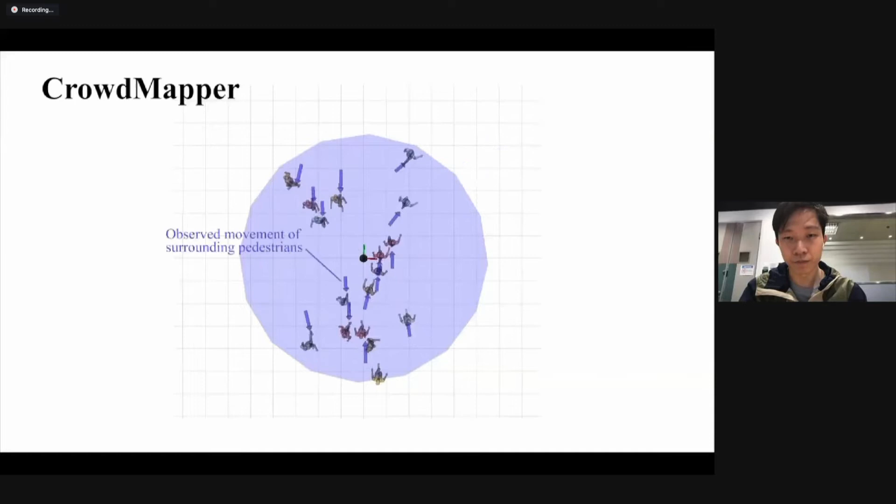So I will introduce the Crowd Mapper module. As we can see, a blue circle represents the local perception radius of the robot. Within the perception radius, the robot can observe the movement of the surrounding pedestrians. Then, we apply the clustering algorithm to model the movement into the crowd flow map. This map represents the pedestrians' movement pattern in the environment.

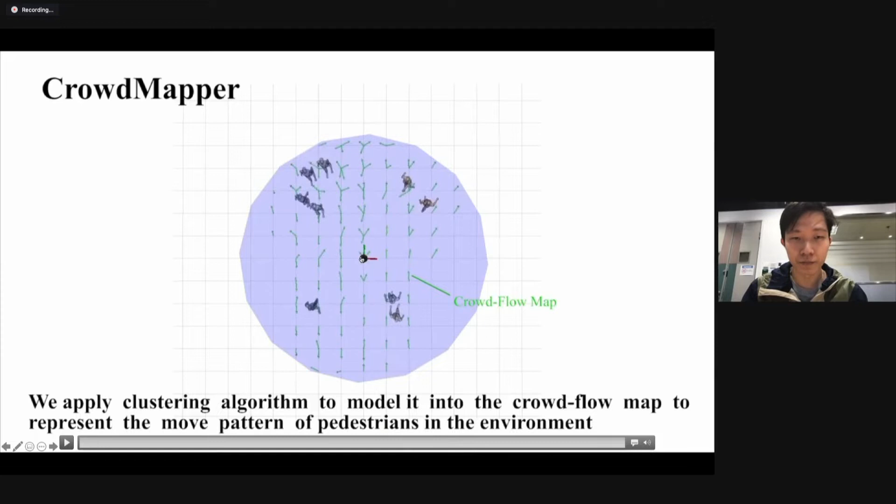By fusing the local crowd flow maps, we can construct the global crowd flow map. The traversable area can be obtained after mapping. The mapping process is completed by the local perception of the robot. Here, we don't use any global perception system like bird's-eye view CCTV.

By using the crowd flow map that we built, we introduce the particle filter-based approach with a flow matching metric. In this video, we compare our crowd-driven localization approach with pure odometry and the geometry matching based AMCL. The red dots represent the particles of our Crowd Localizer. As we can see, the pure odometry will drift at the beginning.

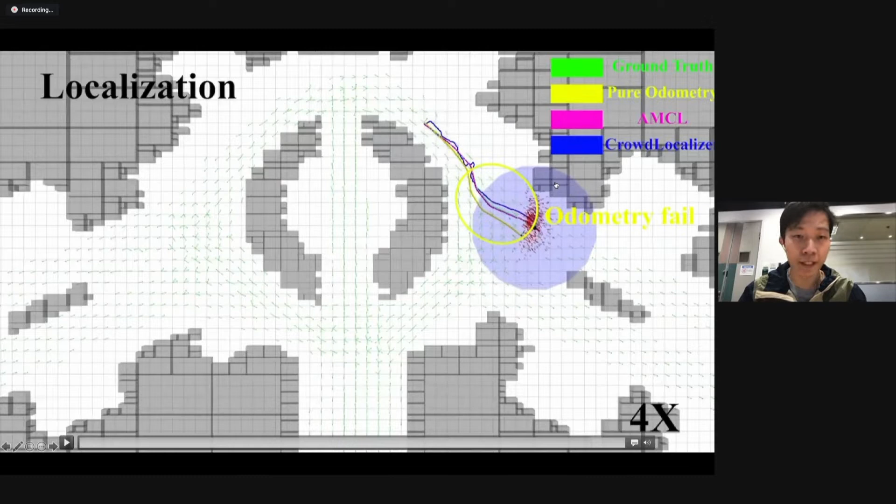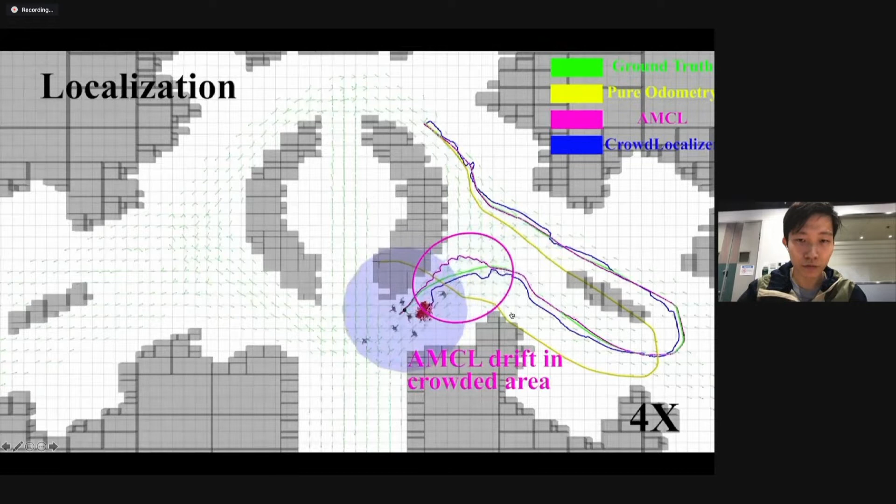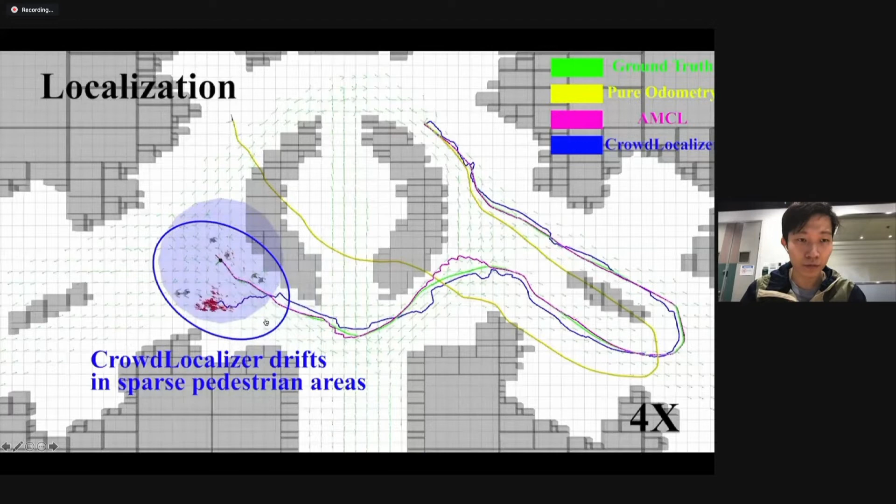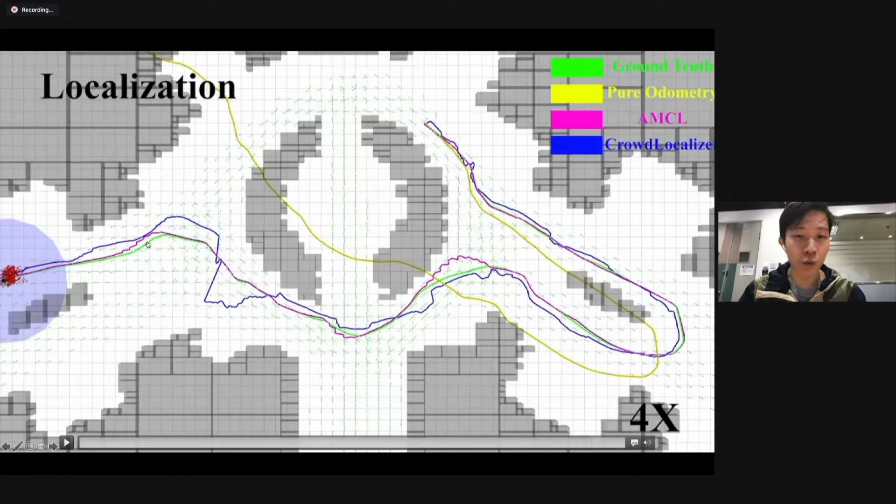For AMCL, localization drift may occur at the intersection of crowds where pedestrians block most static landmarks. However, our approach may drift in areas with sparse pedestrians. But when the number of observed pedestrians increases, the drift can be corrected. This localization experiment shows that the crowd flow sensory is complementary to the geometry information for localization.

Note that our system is not a SLAM system. It cannot achieve mapping and localization simultaneously. Most SLAM approaches rely on instant and time-invariant features, for example, point cloud features in LiDAR SLAM and image features in visual SLAM. These features are time-invariant and can be observed instantly.

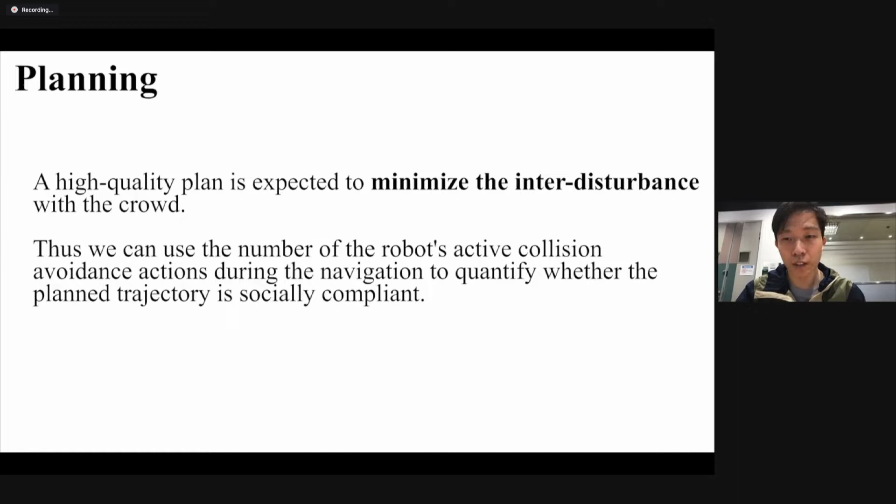Next, we propose that a crowd flow map can help robots achieve socially aware planning. At the beginning, we first define high quality socially aware planning as planning that minimizes the mutual disturbance with the crowd. So we can use the number of the robot's active collision avoidance actions to quantify whether the trajectory is socially compliant.

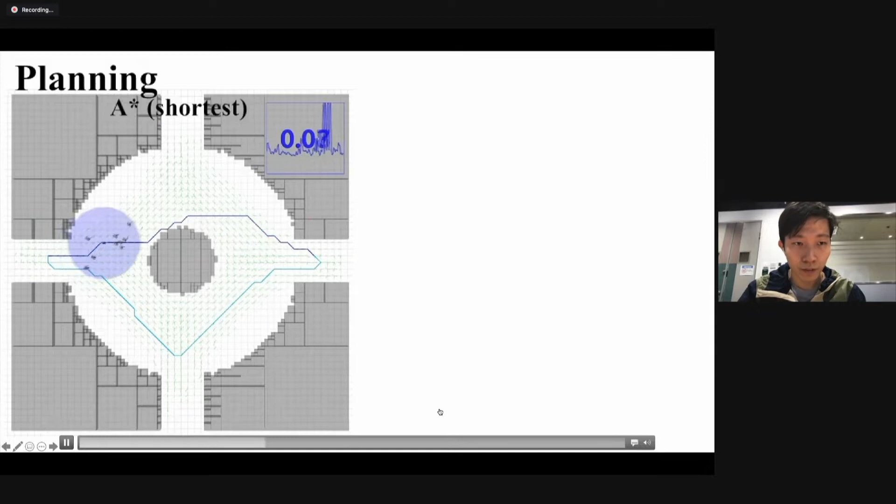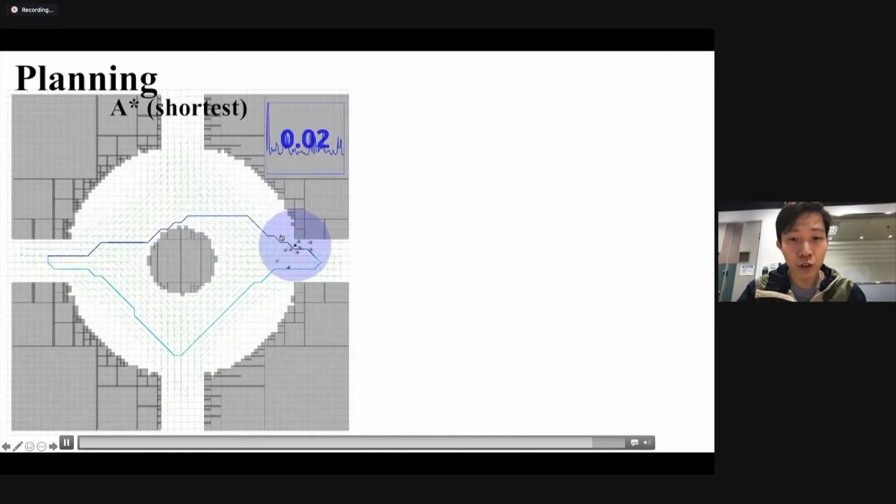As we can see, a traditional planning algorithm, A*, can generate the shortest trajectories, but the shortest trajectory would disturb the movement of the crowds.

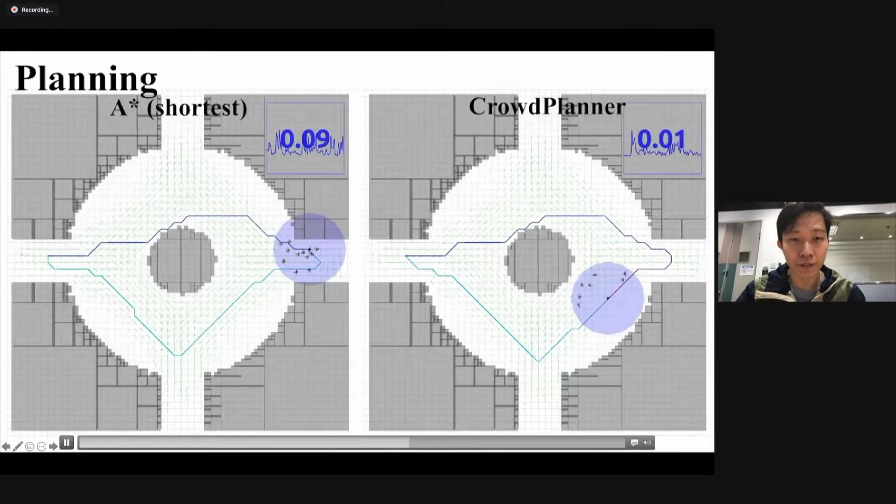However, the trajectory generated by our social aware planner may be longer, but it can lead to less disturbance for the crowd flow. For the traditional planning, the disturbance will occur in the entire trajectory. But the disturbance mainly appears in the intersection area for our social aware planner.

We also deploy our system on a real robot to validate its feasibility and performance in the real world. To make a real scenario with dense pedestrians, we conducted experiments on a university campus at rush hour. We mount a 3D LiDAR and a multi-camera system on our robot to track the surrounding pedestrians.

Conducting real-world experiments is not trivial. Beforehand, we need to calibrate the 4 cameras with a 3D LiDAR. With these sensors, we need to detect and track the surrounding pedestrians on limited onboard computational resources.

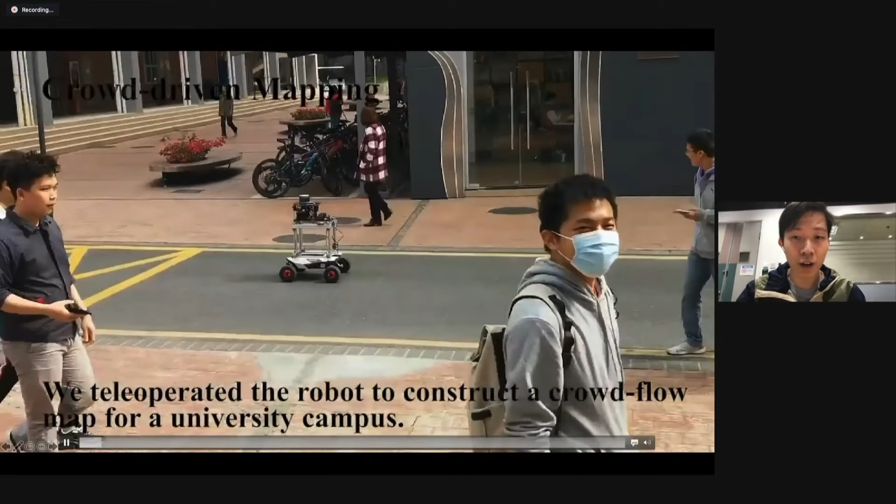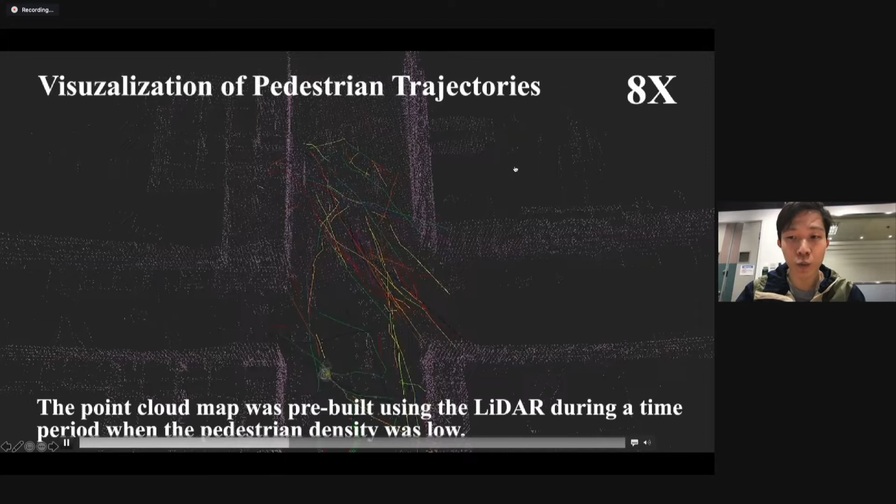We first introduce the crowd-driven mapping experiment. We teleoperate the robot to construct the crowd flow map in this scenario. A point cloud map was pre-built using LiDAR when the pedestrian density was low. Here, the localization results are provided by the LiDAR and the GNSS.

Slow down. Okay, we can perform mapping based on the movement of all pedestrians in this scenario. We highlight the possible crowd intersection in the crowd flow map in this scenario.

I think we have a problem. Sorry, could you just give us a moment? We had a network issue here, because you were frozen at a certain point. Okay, now it seems to work. Go ahead, please. Sorry about that. Do I need to repeat this slide? Yeah, just go one before, just in case. It's frozen again. Can you hear me? Yeah, we can hear you clearly. Can you see my slide? Just give us 1 second to set up. Sorry about this. All right, go ahead now. So I will continue my slide here or next slide.

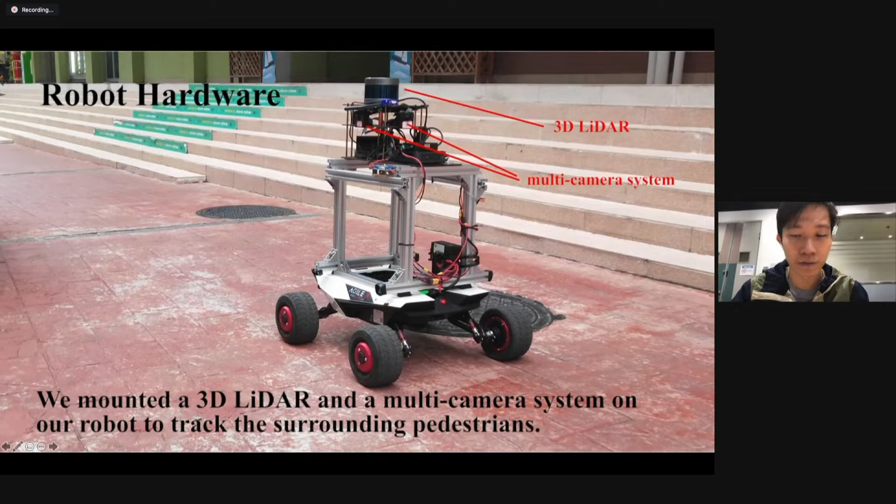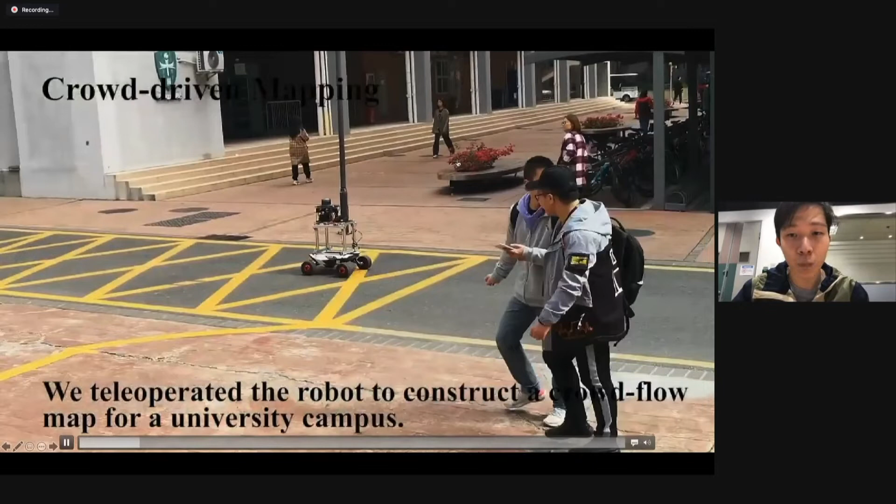Conducting real-world experiments is not trivial. Beforehand, we need to calibrate the 4 cameras with the 3D LiDAR. With these sensors, we need to detect and track the surrounding pedestrians on a limited onboard computational resource. Here, I will first introduce the crowd-driven mapping experiment. We teleoperate the robot to construct the crowd flow map in this scenario.

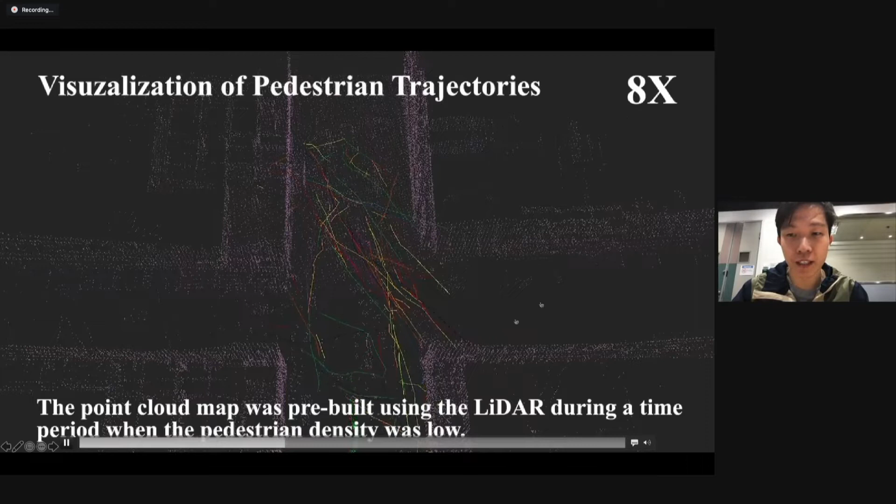The point cloud map was pre-built using LiDAR when the pedestrian density was low. And the localization results are provided by the LiDAR and the GNSS. And we can perform mapping based on the movement of all pedestrians in this scenario. And we highlight the possible crowd intersection in the crowd flow map. Then we can use the crowd flow map for the crowd-driven localization and planning.

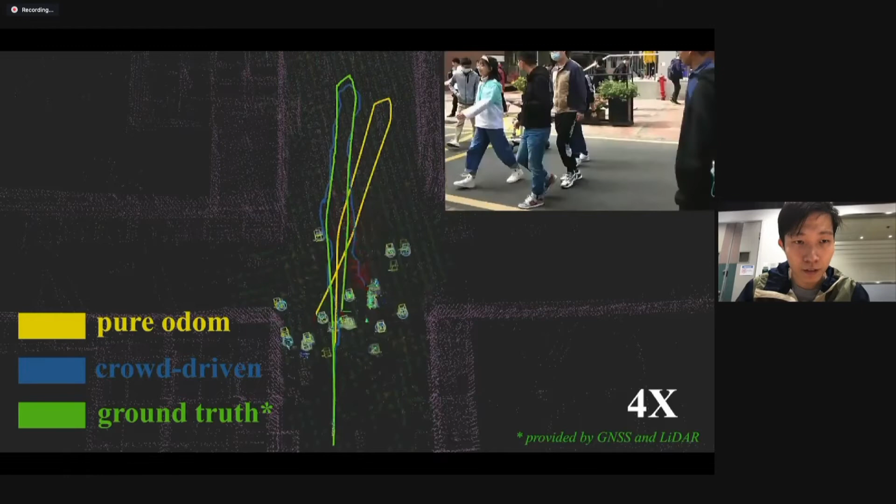As we can see, our approach can outperform the pure odometry method. Similar to our simulation result, our crowd-driven approach can achieve a rough localization in a crowded scenario.

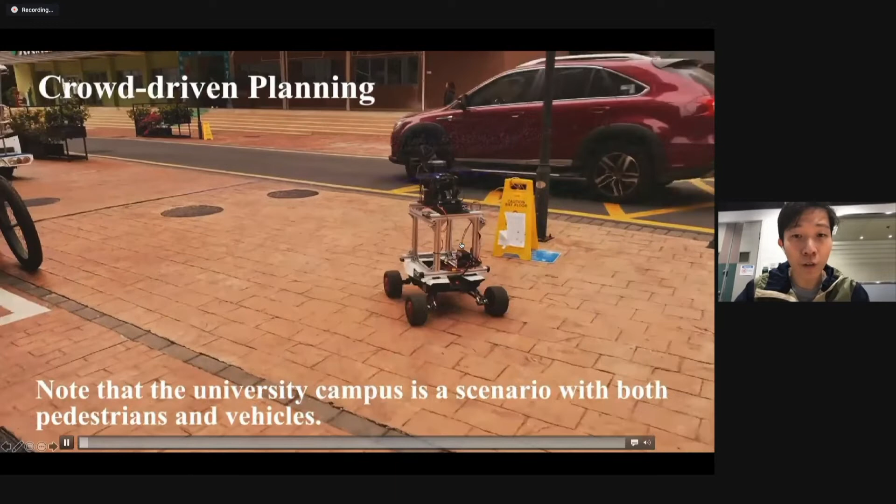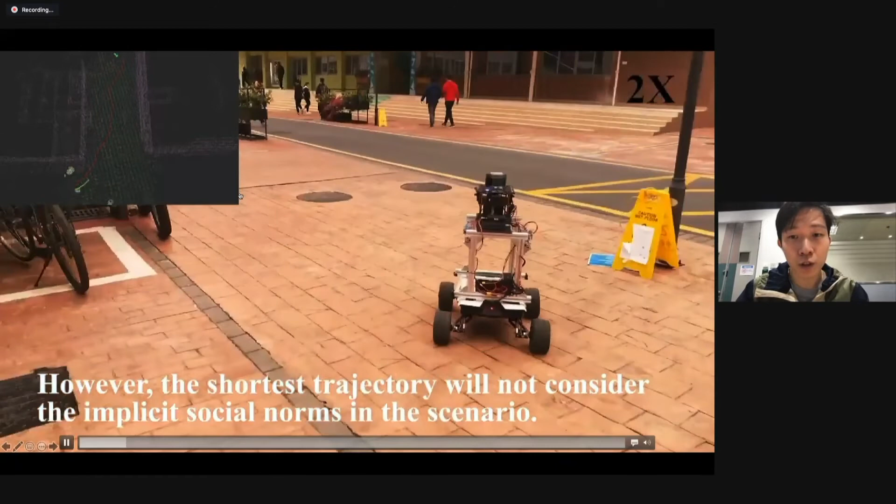For this campus scenario, with both pedestrians and vehicles, our crowd-driven planner and traditional planner generate 2 different trajectories. As we can see, the traditional planner will plan the shortest trajectory toward the goal. But the shortest trajectory will not consider the implicit social norms in this scenario, and the robot will block other vehicles on this asphalt road.

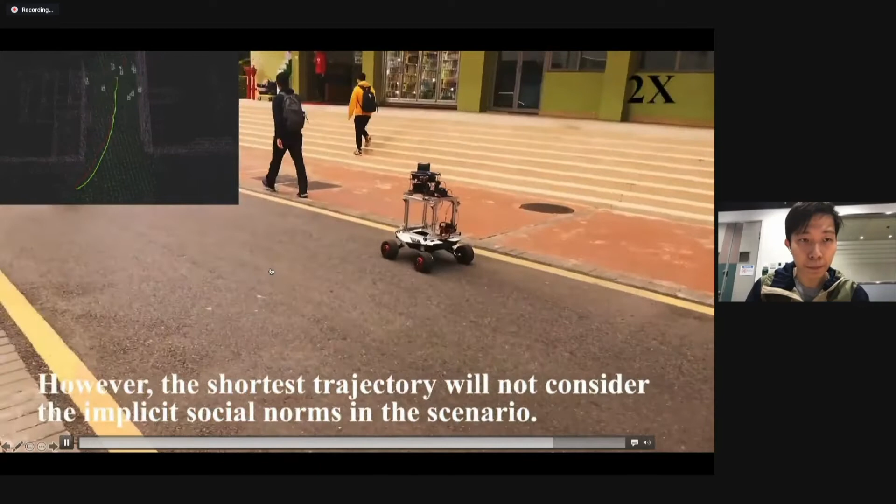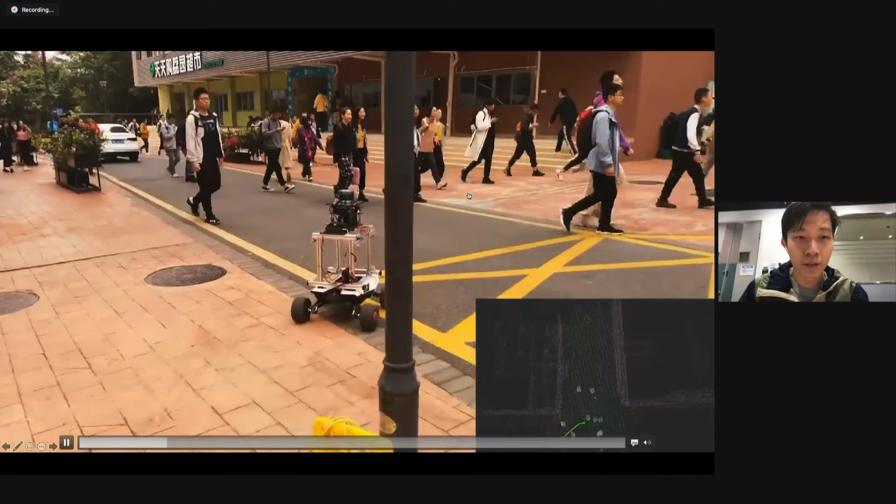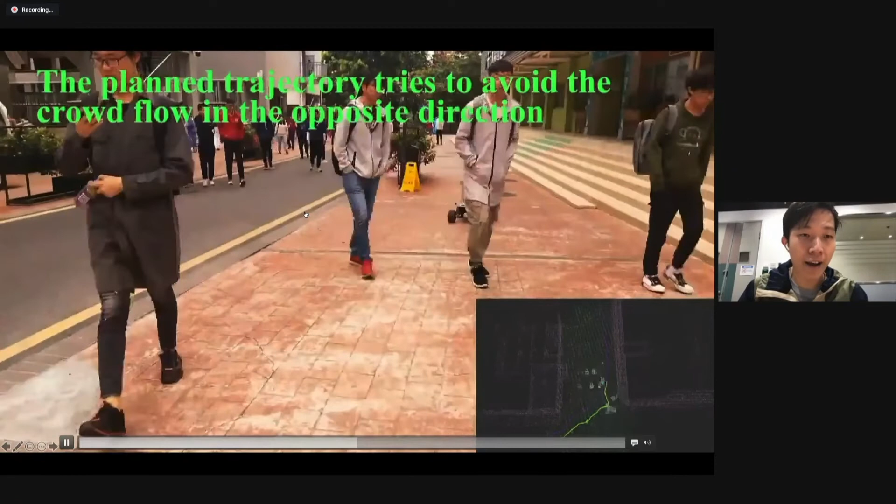However, a social aware trajectory tends to cross the asphalt road first and then walk along the brick road. Actually, both types of roads are traversable for the robot. But our approach can interpret the deeper social rules in this scenario. On the asphalt road, vehicles have higher priority, while on the brick road, pedestrians have higher priority.

In this paper, we validate that our approach can only utilize the crowd flow information as the sensory measurement for robot mapping, localization, and planning. We show that the crowd flow information is complementary to the spatial information for navigation. In our future work, we can combine the crowd flow information and spatial information to realize better navigation.

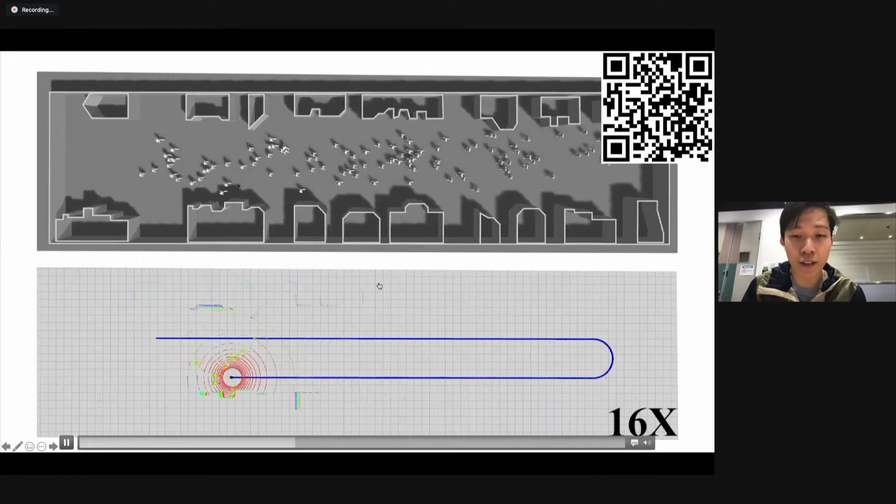If not, I'll just ask one more of a technical question. Xinjian, that's a great presentation. In your simulation data, can you explain how you got the simulated human data? Or did you collect it with an overhead camera? And then also you had the mapping process. You had a multi-resolution map for the AMCL. How did you go about getting that?

Okay, so for the simulation, we use Menge to simulate a highly crowded scenario, or highly crowded pedestrians, in our simulation. And for our real-world experiments, do you want to know how to track the surrounding pedestrians or how to do the mapping? Yeah, so you had a multi-resolution map you didn't have for the occupancy-based mapping, right? So you're using your own way of keeping track of the pedestrian flow. Could you explain how that data structure was stored?

Oh, we used the RGB camera to detect the pedestrian's appearance, and then we project the pedestrian's bearing angle to our 3D LiDAR. Okay. Right. And then we can get a pedestrian's 3D position, and we can use a pedestrian motion model to track the pedestrians in the surrounding environment.

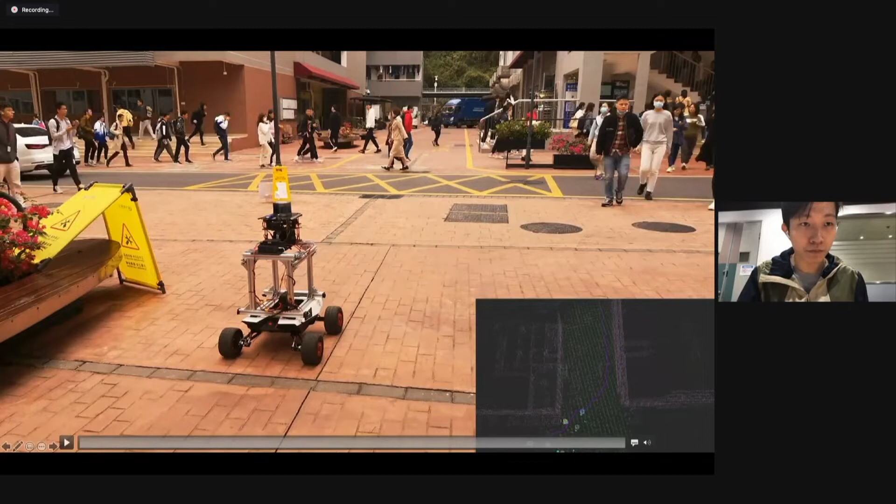All right, thank you. If no more questions, then we'll move on to our next speaker. Thank you, Xinjian, once again. So next we have Sheng Yan talking about visual semantic mapping and localization using parameterized road lanes. Sheng, take it away whenever you're ready.

Hello everyone, can you hear me? Yes, we can hear you. Okay, and can you see my screen? Sorry, wait a minute. I'll just give it 1 second. Oh, I'm sorry, I don't have a camera here, so I just share my screen. Is that okay? Yeah, that's okay. Are you presenting? Okay, sorry, I need to reboot this Zoom program and continue, okay? So Sheng, we will just move on to our next one. Could you try to set it up in the meantime? We'll move to our next talk and come back to you.

Okay. So Andrea, are you on the call? Yes, I am. Can you guys hear me? He wanted to play the video. Yeah, can you guys hear me all right? Yeah, we can hear you.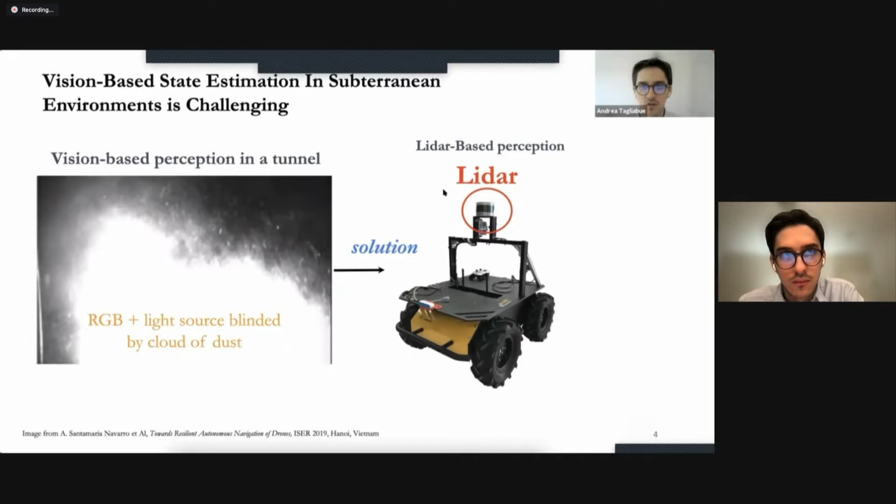For this reason, Team CoSTAR decided to adopt LiDARs as their main sensing solution for their state estimation strategy. LiDARs, however, are not perfect and they have their own failure modalities. And we identify one, which we call motion unobservability. This happens when the geometry of the environment lacks 3D features, so that it becomes hard to understand or estimate the motion of the robot. You can see an example of this issue in this video, where we are showing the point cloud recorded by one of our robots navigating in a corridor. As the robot moves through the main direction of the corridor, geometric features disappear, making it really hard to understand if the robot is moving forward or not. In this case, for example, it's not moving.

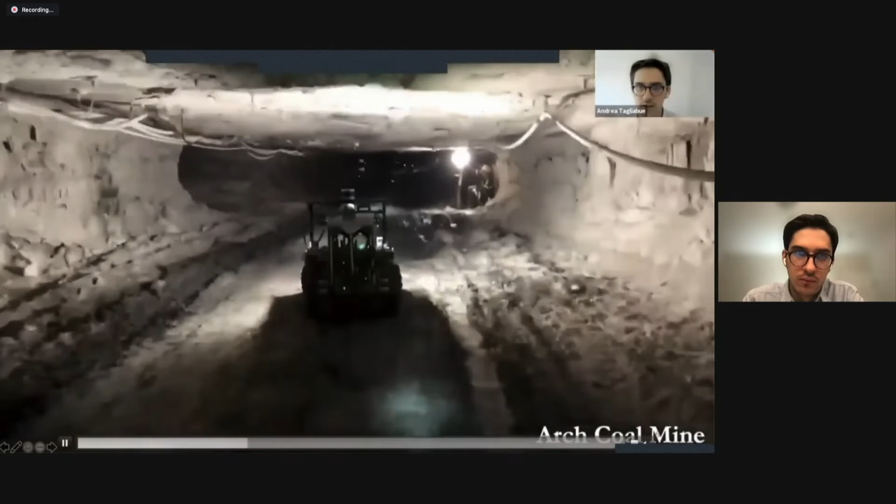In this work, we will present a strategy to enable state estimation using LiDARs for robots deployed in challenging subterranean environments, as you can see in this video, which represents one of the field tests that we performed where our algorithm has been deployed.

And we will additionally present a strategy to detect geometric unobservabilities in the scene that may cause failures when using LiDARs for state estimation. And here you can see the output of our algorithm, which is represented by these 3 arrows, which encode how much each direction of motion is observable.

So next, I will discuss the technical approach, which is divided in 2 main sections, the sliding window estimator and the geometric observability detector. But first, I will provide an overview of the proposed solution, which is represented by this diagram. The main takeaway is that our method relies on the information provided by a LiDAR, as well as an inertial measurement unit. This data is pre-processed and fused in a sliding window estimator. The objective of this algorithm is to output an odometry estimate of the robot.

This estimate is passed down to an algorithm called the resiliency logic, which has been developed in previous work. The objective of this algorithm is to understand if the odometry produced by our method or any other state estimation methods available on the robot are reliable, based, for example, on the fact that some sensors may have failed or some algorithms may have diverged, and choose the odometry estimate that is more reliable, sending it to the underlying autonomy stack. So this algorithm acts as a multiplexing solution for different state estimation methods.

And in order to let this algorithm understand if our state estimate can be reliable or not, we introduce the observability detector, which provides information on the possible quality of our odometry and state estimates, allowing the resiliency logic to switch to alternative sensing modalities if the geometry of the scene does not allow to correctly estimate the motion of the robot. I will now describe the sliding window estimator that we use to produce our odometry estimate.

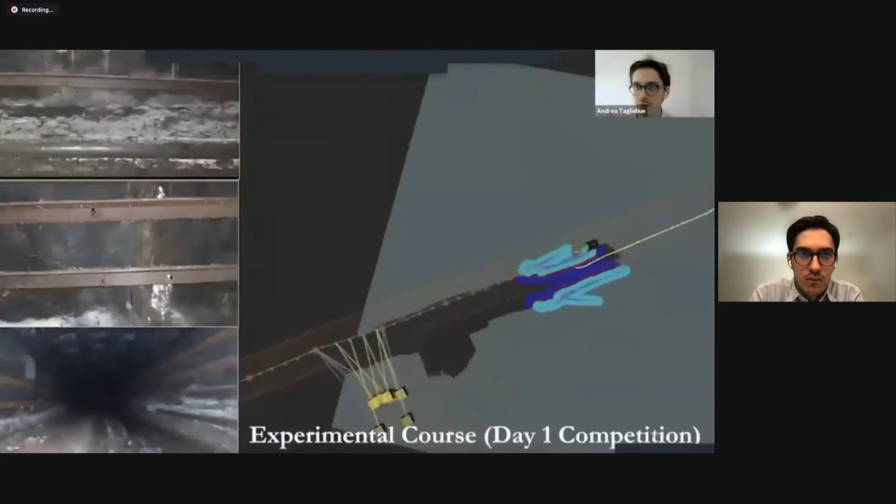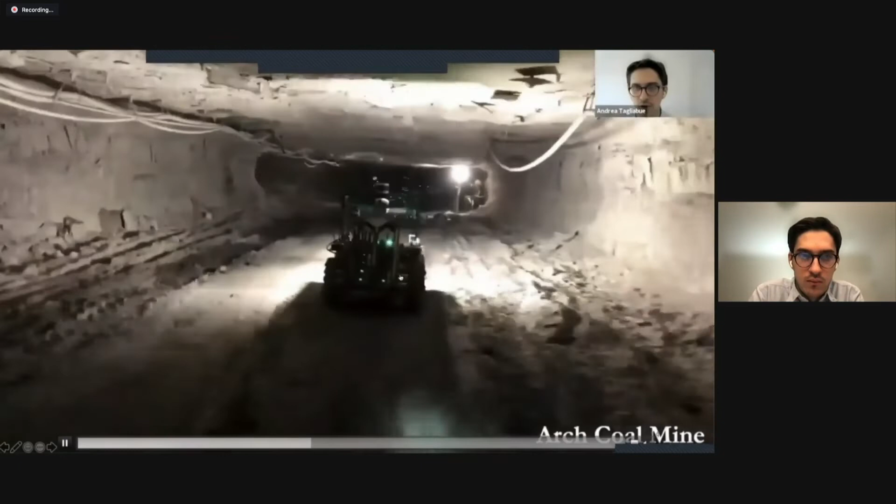The output of Lion is also being used, for example, as input to the planning modules that you can see here. And again, here you can see the type of terrains and environments where the robots have been deployed. And as you can imagine, methods based on wheel odometry become extremely unreliable, as you will see also in the evaluation, because of the muddy terrain and the fact that the wheels can easily slip.

We compare our method with 2 other solutions, which are the wheel inertial odometry, which is based on using the output of wheel encoders and fusing them with IMU measurements using an extended Kalman filter, and LOAM, which is a LiDAR odometry method described in this paper, which does not use, for example, IMU measurements. And Lion is used without the observability module in the context of this evaluation. And the ground truth is computed using LAMP, which is the global localization solution developed by Team CoSTAR.

However, Lion presents some key system or field advantages, which are the fact that its output is gravity aligned thanks to the fusion of IMU estimates. It outputs the velocity of the robots, unlike LOAM, as well as the extrinsic calibration. And its output can also be generated up to IMU rate, unlike LOAM.

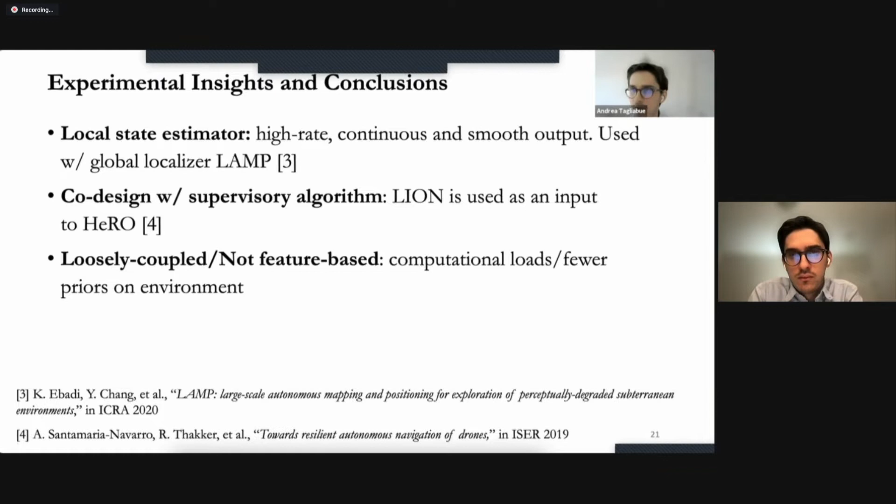In addition, we decided to use a loosely coupled and non-feature-based approach for the following reasons. First, there is a computational advantage because feature extraction is in general computationally expensive, and it is possible to share the computational cost associated with performing the ICP algorithm, for example, by reusing the output of ICP for other algorithms. Additionally, not using features allows us to have fewer priors on the environment, making the method potentially more generic. So with this, I've concluded, and I'm happy to take any questions.

Thank you, Andrea. So, any questions from the audience, or even the virtual audience? I guess if not, we are really running over time.

I'll just ask a quick question. When you're doing the observability detection and then switching controllers, how do you handle any discontinuities that you would get from your different sources of odometry? Yes, so I believe this is taken care of internally by the resiliency logic, which modifies the reference frame of the sources to take that into account. So it transforms.

I believe that what changes is the goal for the controller rather than the state estimates. So that frame gets updated. So the discontinuity is pushed into the reference position for the controller, for example, rather than having a jump in the state estimate. Mm-hmm. All right, thank you.

Yeah. All right, thank you, Andrea. We'll move on to our next speaker. Again, Sheng, are you ready with your slides? Yes, I'm ready now. Can you see my screen this time? Just give us 1 second. Hello, can you see my screen this time? Just 1 second, Sheng. Yeah, now we can see you. Can you put it in presentation mode, please? Okay. Sorry for the interruption, and now I will begin my presentation.

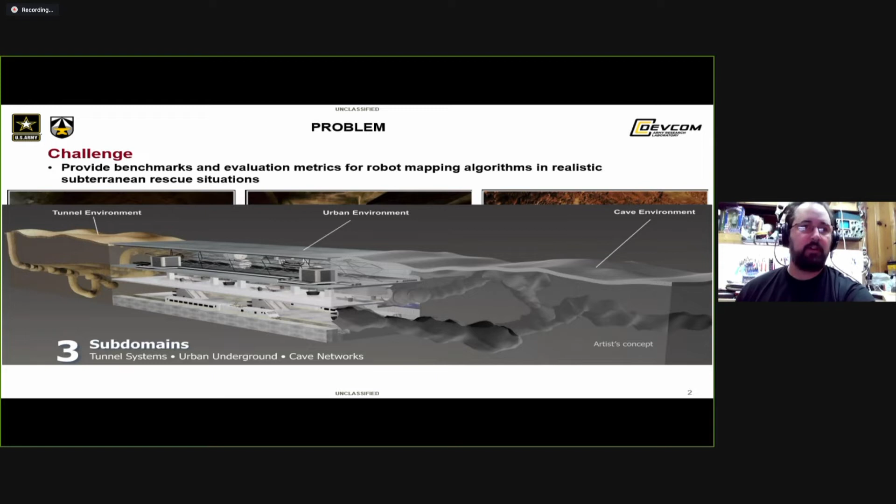Briefly, my work is focused on the evaluation of SLAM algorithms, simultaneous localization and mapping. SLAM is a technique for robots to localize themselves in the environment or determine their trajectories, while simultaneously recovering a map of that environment, which can be used for navigation. Typically, in modern implementations, this consists of smoothing a graph of measurements of features or landmarks or relative poses of robots as they move along their trajectories.

In the urban underground circuit, the course was built inside the abandoned, incomplete nuclear generation plant in Washington State, United States. This facility has 1 out of 2 reactor buildings constructed, but never featured any of the heavy equipment or reactor cores. In the main reactor building, where the alpha and beta courses were constructed, there's a central chamber which would have been the location of the reactor core.

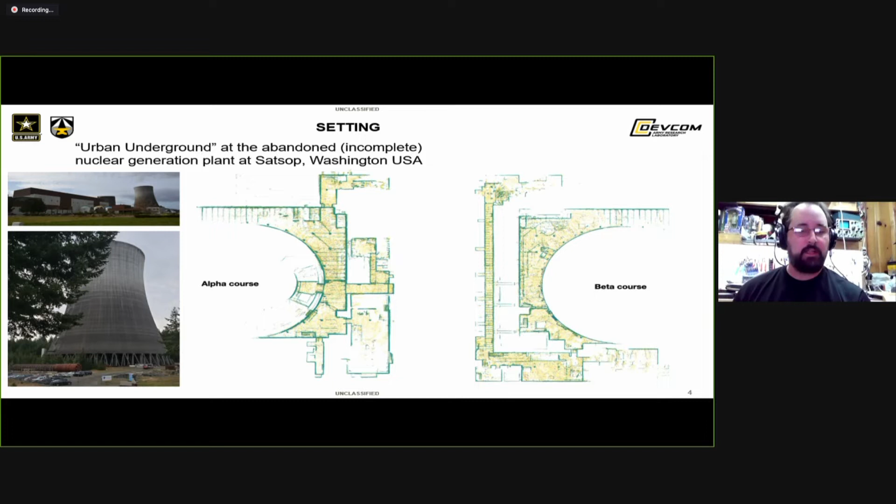We used our robot systems from the Army Research Laboratory to collect the data sets in these courses, and to handle the specific challenges in the urban circuit, which consisted of a number of stairways that had to be traversed. I've used an iRobot PackBot Explorer with flippers that enabled me to drive down the stairs to some degree of

success. And on board this robot, we collected data from Ouster OS1-64 LiDAR, as well as the Carnegie Robotics Multisense SL Stereo and LiDAR. This was also used to provide illumination so that the artifacts within the course could be detected. On board the robot, we also use a MicroStrain 3DM-GX5-25 IMU.

Thanks to the efforts of my colleagues at MIT, we were also able to bring in a quadrotor robot to collect an aerial version of the data set as well. And here is an image of it. It consists of a RealSense D435i, and therefore it's only collecting a visual data set, and it does not have any onboard illumination.

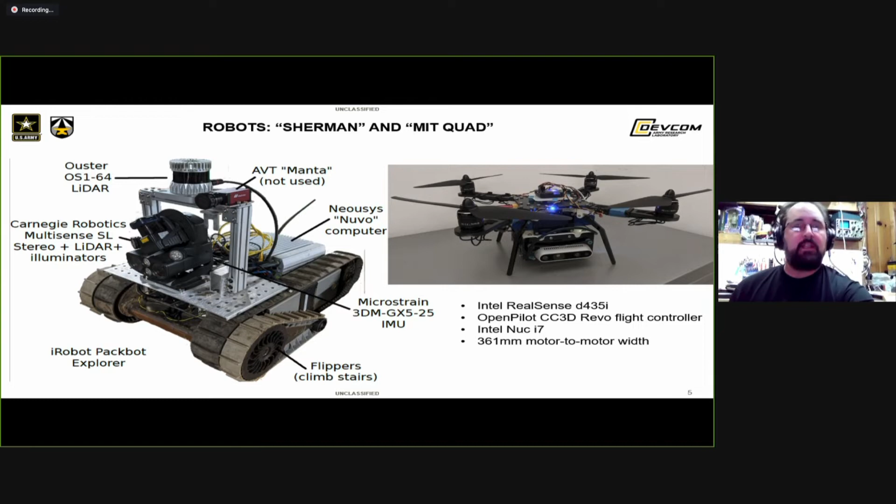The DARPA Subterranean Challenge entrance portal consists of a series of localization fiducials, which are used to establish a global frame of reference. So the first part of each of the ground data sets that I have provided here will feature observation of these fiducial landmarks to establish this global frame of reference.

In the DARPA Subterranean Challenge, points can be scored when artifacts are located within the environment within 5 meters of accuracy. So anything within 5 meters of absolute global position as compared to a ground truth state will result in scoring 1 point. In our evaluation, we also record the minimum error that a landmark is detected, the maximum error that we report a landmark, as well as the composite root mean squared error of all artifact detections.

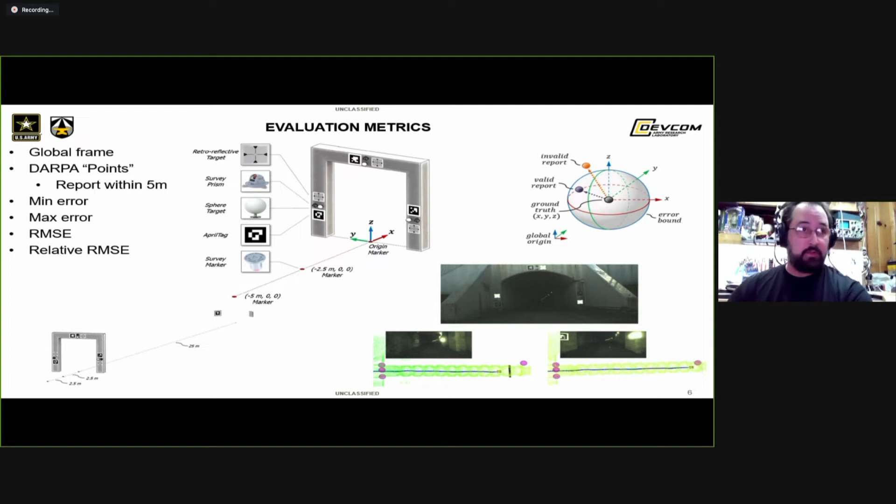In this work, we also introduced a relative root mean square error metric that can be used for the aerial data sets, which don't feature observations of the initial fiducial landmarks for global localization. Points are scored in our data set by providing the solution to the ROS TF system in the following way. When artifacts are observed within the data set, I have encoded them.

So first of all, the robot receives this global frame alignment from observations of the fiducial landmarks at the beginning of the run. Then secondly, I have encoded the location of the artifacts within the environment. Here, the vent artifact is observed. I have an interface that allows me to click on this and generate a relative measurement from the robot to that artifact during a coding run that records an auxiliary file that can then be played back during a mapping

analysis run. And during the mapping analysis run, the mapping system under test will provide the missing transform between the robot start frame and the robot's current location at the time of the artifact sighting. By composing these transforms, a global localization can be computed for the artifact and it can be compared to ground truth.

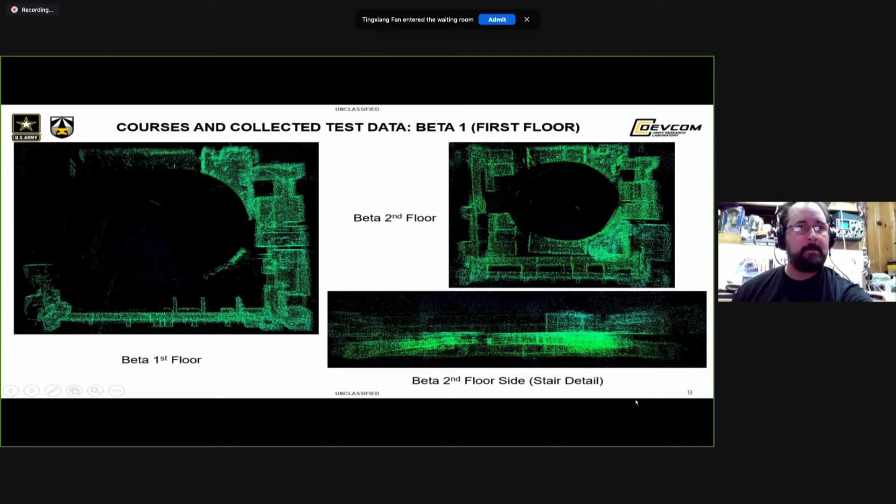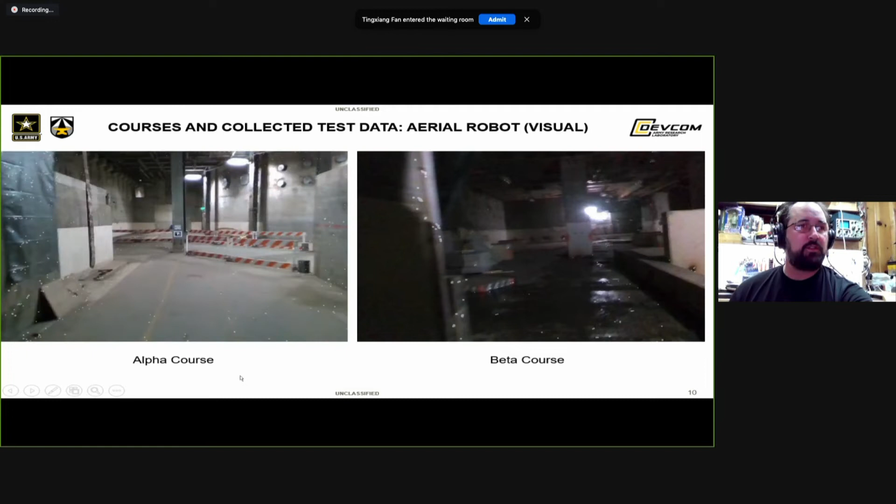In addition to the ground data sets, we have 2 new visual data sets collected by our quadrotor, focused on portions of the course that are very well lit. Lighting was an issue for the visual SLAM algorithms we evaluated. So this had to be limited to shorter sections where there is much more light.

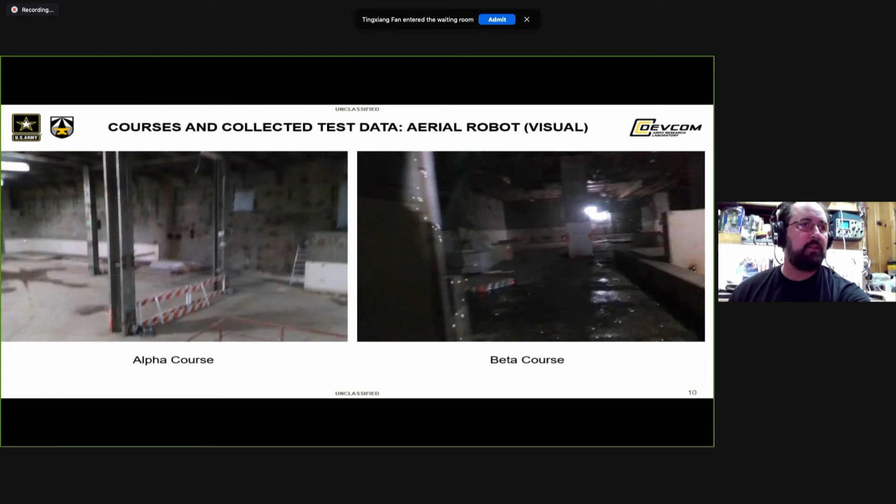Here's the alpha course. You can see it's brighter overall. And then the beta course is quite a bit darker. And this is the most well illuminated section of that course, which is still quite dim.

So in our initial evaluation, we also tested a number of existing SLAM algorithms, starting with our own implementation of OmniMapper, which is released here on GitHub in our open source version. This is actually the version we use in the Army Research Laboratory and in the Army Research Enterprise for performing LiDAR-based SLAM. We also evaluated Cartographer from Google, LeGO-LOAM, which includes a loop closure component, and we also looked at how well the system would do if we just integrated the odometry on the platform and didn't perform any sort of SLAM operation.

The Alpha course, Alpha 1, was the easiest of the four ground robot courses. And that was because it featured mostly planar motion and didn't involve any stairway traversals. And it involved a lot of larger open spaces where the LiDAR-based SLAM was able to make observations with long range. In the Beta 1 course, the robot had more difficulty with a long initial corridor, which in Cartographer especially, if we ran it without odometry, suffered from bad aliasing down that corridor and resulted in very poor localization.

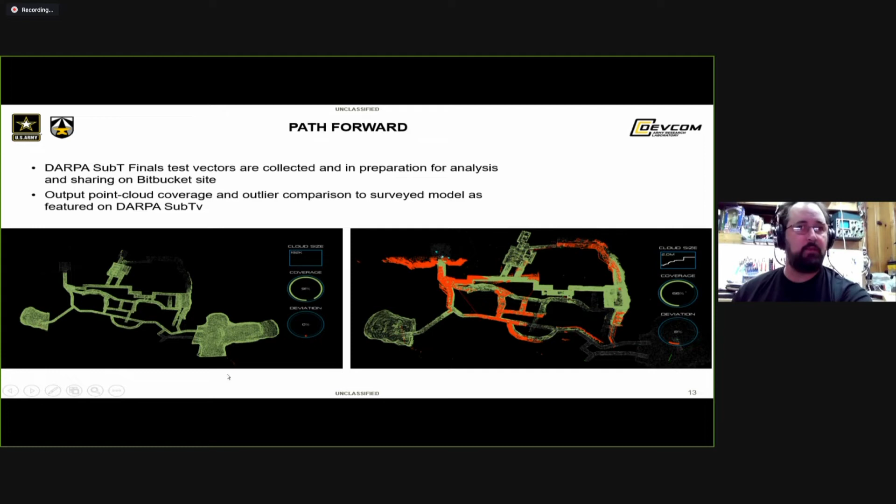In the future, we're going to be providing the DARPA Subterranean Challenge Finals test set, which will consist of multiple runs in the course that was just completed in September of this year. And here's a bit of a preview of that. We also have a new mapping analysis metric, which was provided live on DARPA SubT TV, which gave you the coverage rate as well as the deviation from a ground truth point cloud. So we can take in the point clouds that are coming out of SLAM and evaluate them directly against a ground truth point cloud.

And now I would take any questions you have and invite you to take a look at these data sets and evaluate your own SLAM algorithms as well.

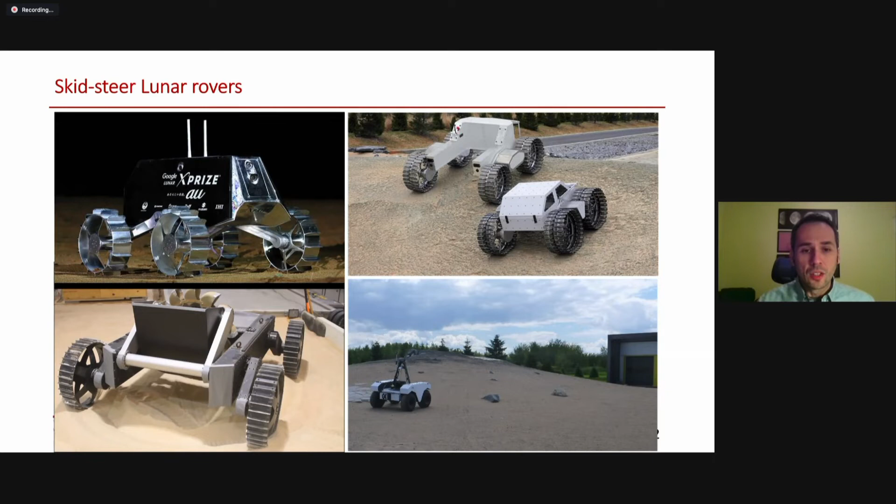One of the challenges with skid steer robots is the amount of power required to actually perform a turn. So there's been work in the literature looking at how the power consumed by a rover is related to the turning radius. For a skid steering rover, tight turns require much more instantaneous power than broader arcs do.

But of course, one of the other things we really care about is the total energy consumed, and the energy consumed is the integral of power over time. So we also don't want to take such wide arcs that we extend the path so much that in the end we lose any savings from the lower power.

So in our work, we evaluated a few different approaches, namely driving in circular arcs and lines versus point turns and lines. So point turns and lines are a very popular operating mode for skid steer rovers, as the planning aspect and the execution aspect is very simple. But we compared these two circular arc and line combination trajectories.

And in particular, we found that there's one turning radius that is a key reference point for us, which we called R prime, which is the turning radius that's achieved when the inner wheels aren't turning. This is defined as half of the rover's slip track, which is a term that has been defined in the literature in multiple papers. So we found that R prime is really important, especially on hard ground. So when you're operating the rover indoors or on hard surfaces, rocky surfaces outdoors, then we found that turning at R prime is the energy optimal way to operate a skid steer rover.

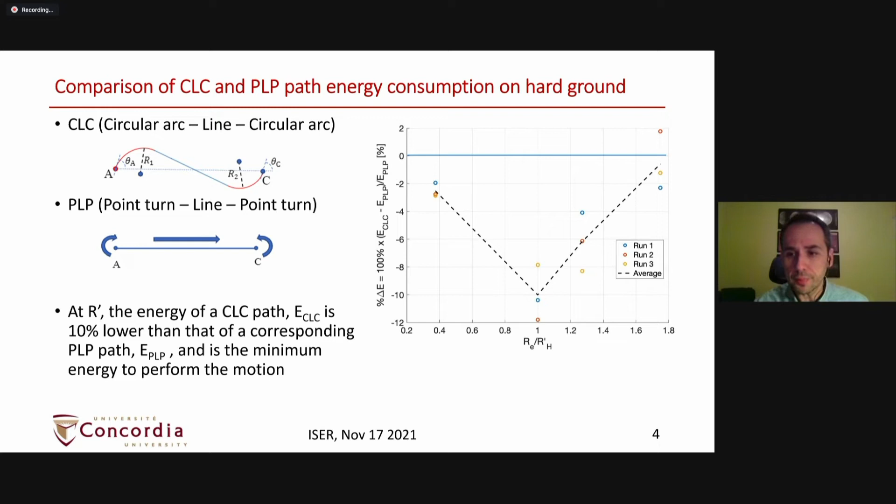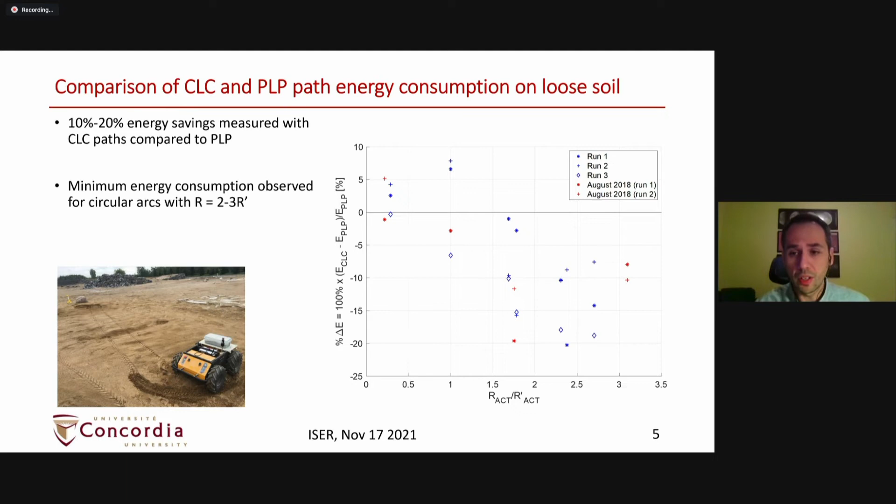We investigated that, and we found that there are a couple of factors that lead to that. One of them is that when you're driving at R prime, the inner wheels aren't turning, so you're basically dragging them through the soil, and you can experience this bulldozing effect, pushing through loose soil when you don't have the wheel spinning. And actually right below R prime, to achieve a particular turning radius, the skid steer rover is commanded such that the outer wheels are driven forward and the inner wheels are driven backward. So at a point turn it's doing that, but at any turning radius between a point turn and R prime, it's also doing that.

But because of the slip track of the rover, those wheels, despite being turned backwards, are being dragged forward by the overall motion of the robot. So you can have situations where the wheels are rotating backwards, excavating soil out in front of the wheel, and then being dragged through that pile of soil. So these are some lessons learned in terms of operating these skid steer rovers at various turning radii.

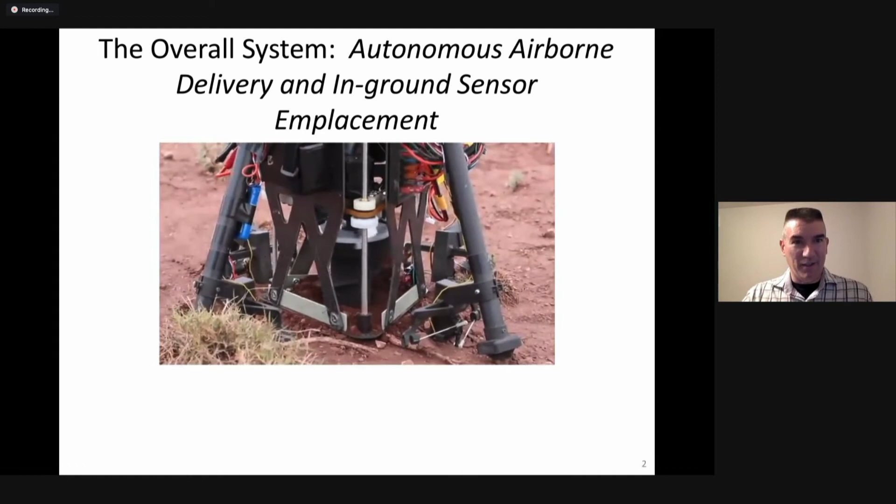I'll show you a quick video to motivate the discussion. We have a system that's on a DJI octocopter. You can see on the bottom here, there's a rather large system attached. That is a drill, essentially. What we do is we have an auger, basically a giant drill, but that's hollow. We drill that into the ground, leave it there, the drone flies away, and we leave a sensor inside the soil.

And this is what that looks like. Basically, it's a hollow plastic 3D printed auger, and you can put whatever sensor you want in there. For our project, we're less concerned with what the sensor is. Our sponsoring agency was more interested in our ability to put a sensor in the soil. But one of the best examples of why would be a seismic sensor, where you want a very tight physical coupling to the medium you're measuring. Other sensors can analyze the soil itself in terms of chemical or mineral contents.

We can have airborne particles that come down to the ground. You could have a sensor and leave it there. It also has the benefit of being unobtrusive, so wildlife or passersby aren't necessarily going to confound your data gathering attempts. So that should give you an idea of why we want to put a sensor in the ground.

The main challenge, though, is actually drilling the sensor into the ground. Typically, when you want to drill something into soil or any other medium, the solution is to add more weight or push harder on the bit. We call that weight on bit in the drilling community. Or add power to the motor itself.

We don't have that ability because we're on an aircraft and we're constrained by the weight the aircraft can carry. Right now, I'm pretty much at max gross weight. So if I were to add more weight to dig better or add a larger motor, I wouldn't be able to fly anymore. So we're kind of stuck where we are. We need to find an optimal way to use what we have with that augering system.

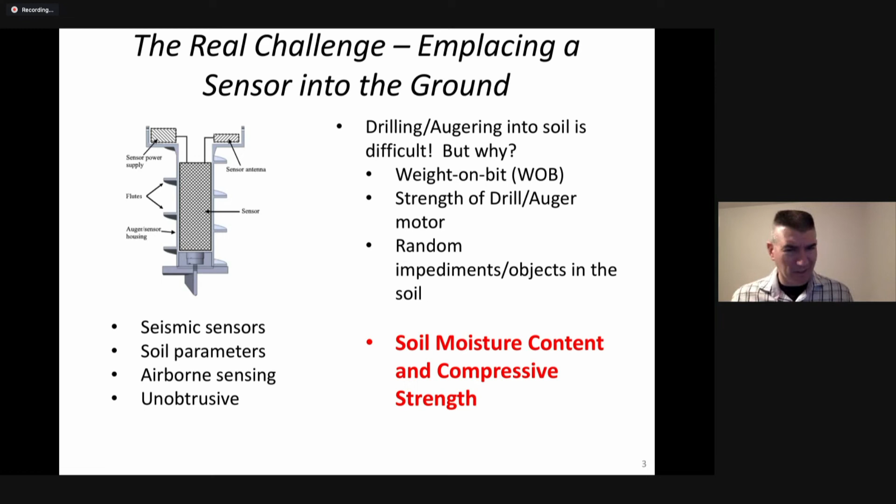Soil moisture is essentially how much water is in the soil mass, and compressive strength is a measure of how much force is required to displace the soil from its current position, measured in kilograms per square centimeter. Understanding those two parameters allows us to change the way we dig. Different soils require different techniques with our limited system, which can only push downward with about 11 kilograms of force. So I have to use different digging techniques.

One of the main ones we use is called pecking. A peck is when you have an auger in a hole and you pull it out, allowing the accumulated material in the flutes, the helical coils that wrap around the shaft and transport material out, to clear. In some cases they get clogged, especially in wet soil. So when we peck, we pull the auger out of the hole and allow that material to fall free.

And then we can put the auger back down the bottom of the hole and allow for more material to be brought up those flutes. We also adjust how hard we push down when we dig. Like very hard and dry soil, we don't want to push down as hard. We want to use a lighter force to allow the tip of the auger bit to essentially break up that soil and then transport up the flutes. We can also change the rotational speed. So these are techniques that we can do, but we have to understand the soil properties first.

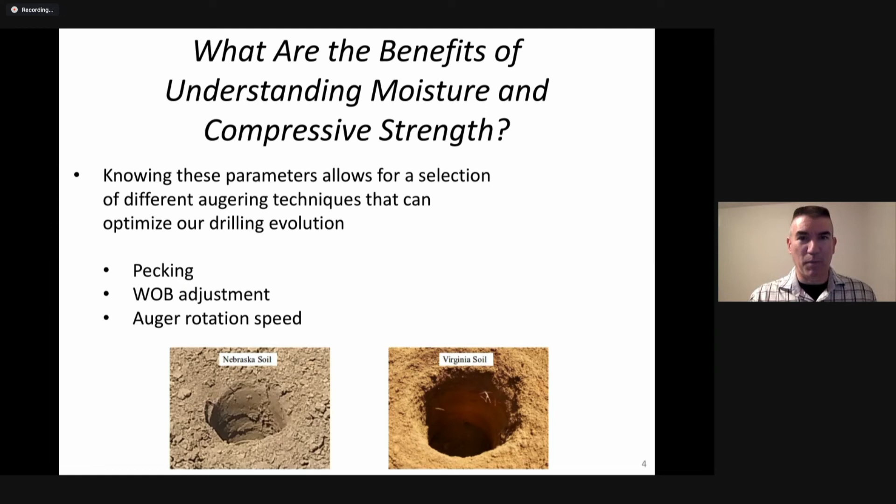And if you're wondering why we can't just directly measure these properties, I can't add more things to the aircraft already. In order to measure soil moisture, I would have to use, in this case, what we would call a capacitive device, which is you essentially stick two probes in the soil, measure the amount of electrical current that flows between those probes, and you can estimate your soil moisture. The problem is I want to know what the soil moisture is at any given point in that column of soil. So I would have to remove the auger and place a probe in there. I can't do that mechanically on the system that I have.

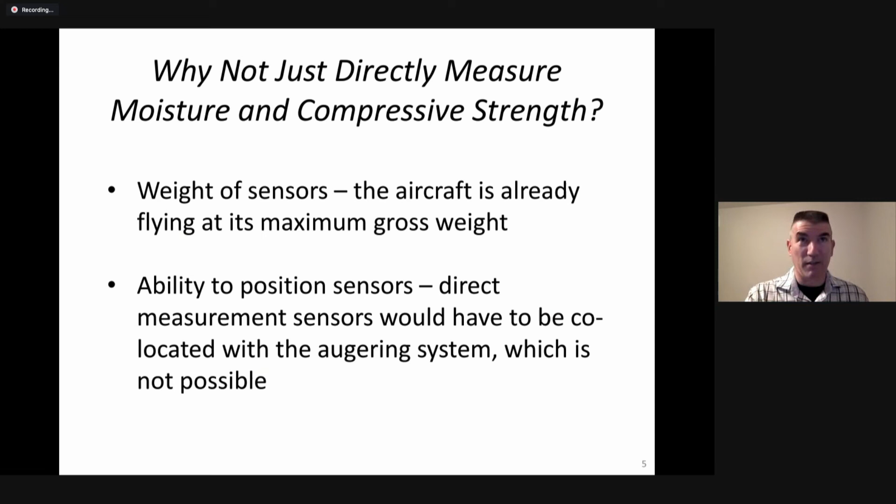And the same holds true for compressive strength. That is measured with a device that essentially is a strong spring with a probe that you push into the soil. And I don't have a way to mechanically actuate that. So I need to find a way to understand the soil moisture content and the compressive strength without direct sensors.

So why is all of that necessary? The idea is that everything on my aircraft is autonomous and battery powered. So I need to be able to get my sensor into the ground efficiently, or I need to be able to pick up and move to a new location. Each augering evolution takes about 85 to 90 seconds. I want to know fairly soon if I'm going to succeed or if I need to change the way I'm drilling. So it's important that we do this with some rapidity.

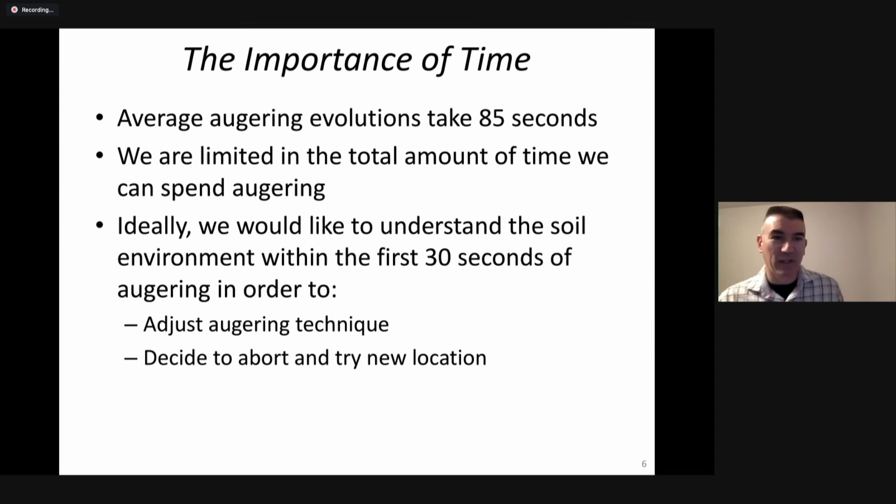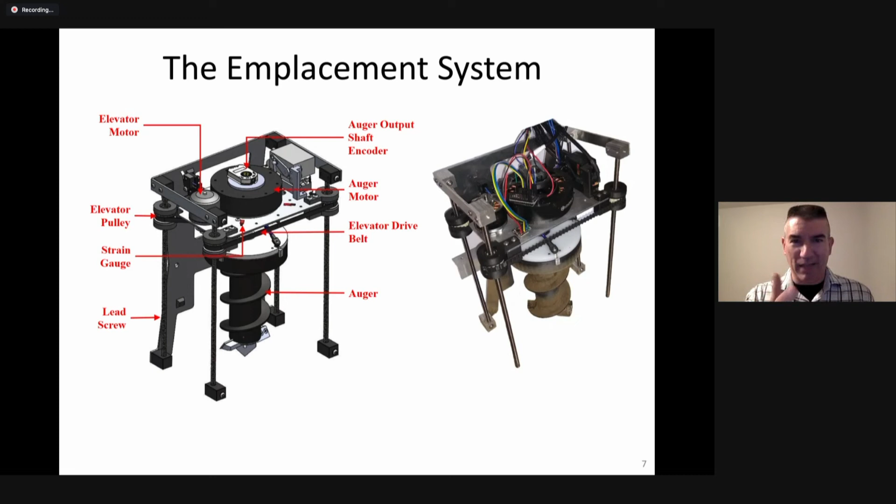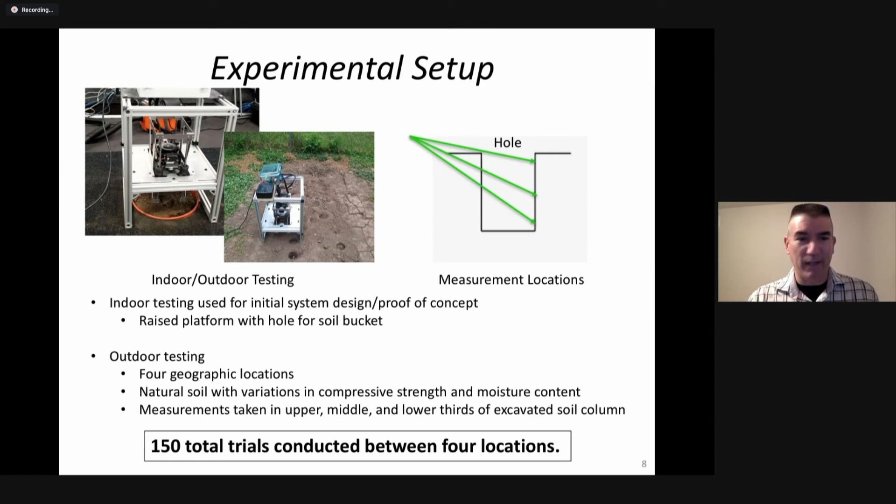Measured in various parts of the United States over the course of this work. And I would take telemetry data from the drilling system, and I would also do manual measurements of the soil properties at 3 points in every hole I dug. So I would measure the soil moisture content and the compressive strength at various parts of the hole, so I would have a ground truth to use for the training of my algorithms.

So out of the 150 trials I did, that means I had 450 soil measurements for moisture and 450 for compressive strength. The moisture ranged from 0 to 80%, so very dry to very wet. And the compressive strength ranged from 0.2 kilograms per square centimeter up to 4.6.

To give you some more human understanding of what that means, at 0.2 kilograms per square centimeter, you can take your finger and push that into the soil pretty much arbitrarily up to whatever depth you want on your knuckle, so to say. At 4.6 kilograms per square centimeter, if you touch that soil, it's going to feel like a rock. You can tap on it and it will sound like a rock. Eventually you'll be able to dig through it, but it's very hard.

We also then sampled the parameters from the digging system itself at 10 hertz. So over the course of the experiment, we generated about 2.8 million individual data points that we were able to analyze. So to classify the soil moisture and the compressive strength, we essentially evaluated numerous machine learning algorithms. These are all statistically based.

We didn't do any deep learning for this particular work. We found when we used Gaussian process regression, we actually got the best results. So in terms of the feature set that we used for the predictive algorithms, we used the motor current of the auger. We used its rotational RPM. We knew how much time we spent digging. We were able to measure how far down we were.

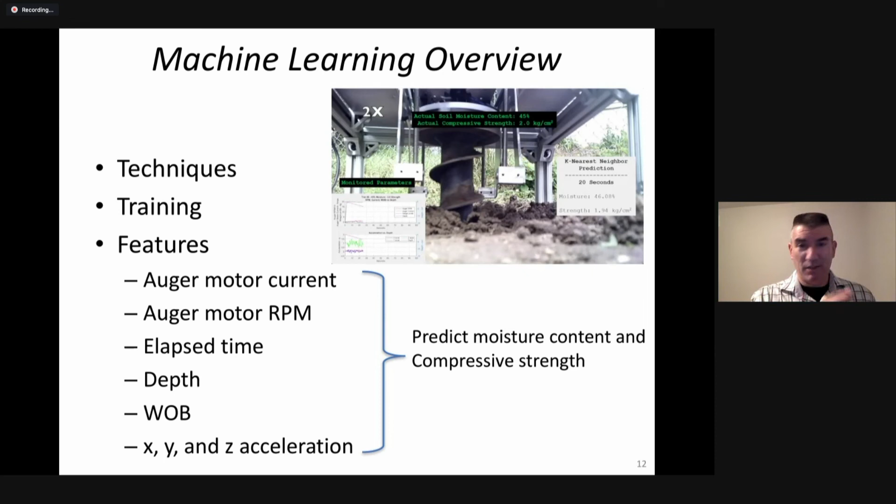I have strain gauges on the system to allow me to know how much weight I'm using on the bit, so how hard I'm pushing down. And we also use accelerometers in the X, Y, and Z axis to measure vibrations. This actually helps with finding foreign objects. Like if you hit a rock, you'll get a very massive spike in a couple axes on your accelerometers. So we would use these as our feature set and apply it to the various algorithms.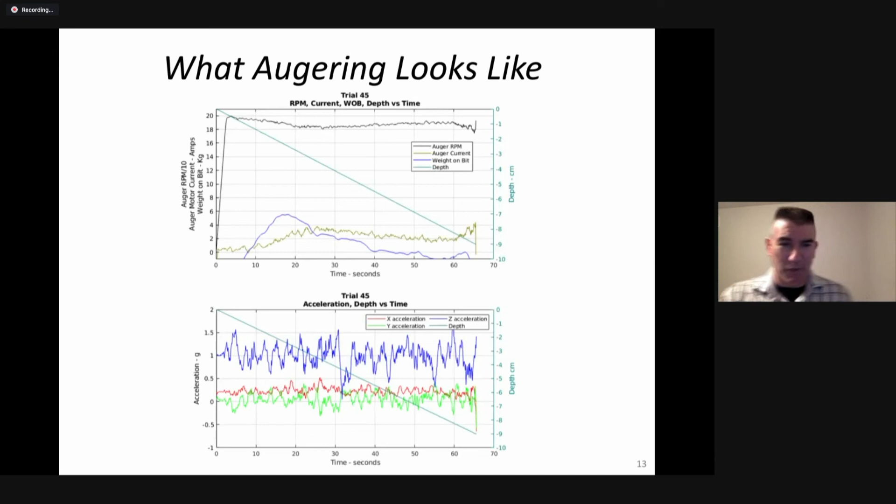As motor amperage goes up, we saw some RPM dropping. So those are what we measure, as well as the weight on bit. And then at the bottom, you can see we measure acceleration in the axes. So when we ran it through all of the algorithms that we chose to try, we found that the Gaussian process algorithm, the regression scheme that we use, worked very well.

So for the future work, the idea is to take our soil estimation and consult that in real time as we dig, and then apply it to an adaptive capability to change the way in which we drill into the ground. Because you can imagine as you start out in dry soil, as you go downward, you may hit some wet clay, and you're going to have to change the way you dig at that point in order to effectively and efficiently get your sensor into the soil. And we may look at some deep learning. I'm not sure where that's going to go at this point.

So I will conclude by saying that drilling from an unmanned aircraft system is a unique problem, and it's very challenging, but it can be done. And we do find that certain machine learning techniques give us very useful policies for classifying or regressing through the soil in terms of its moisture content and compressive strength. We use the sensors that are on board the aircraft to estimate this without having to actually measure it with the appropriate sensors that you would normally use. And Gaussian regression and our classifiers give us a very accurate means of estimating the soil in terms of what we would want to do for adaptively digging.